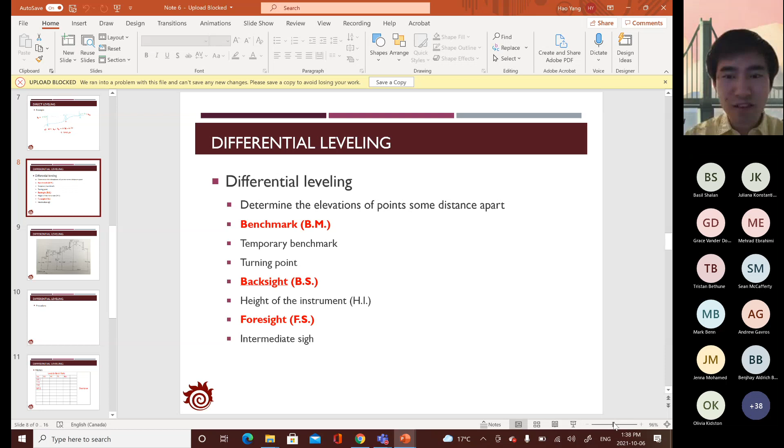So for the method, actually the method you applied in your lab 2 experiment is called differential leveling. With that, we can estimate the elevation difference of multiple points, or about 2 points which are really far away from each other. In differential leveling, there are some concepts we have to know, including the benchmark, which would be the point where we know the true elevation.

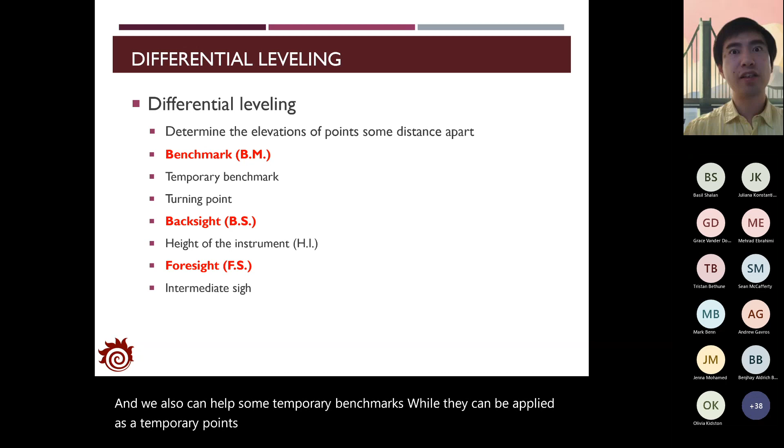And we also can have some temporary benchmarks, which can be applied as temporary points during the experiment. With that, you can do some corrections about the potential errors you conducted during the experiment.

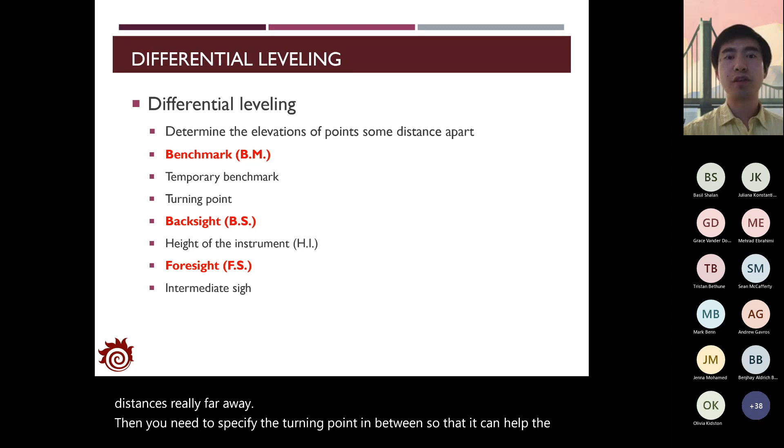And there are some turning points where, if the two measured distances are really far away, then you need to specify a turning point in between so that you are able to observe both of them. You can set up multiple turning points between the two target locations and measure the elevation gradually to reach the target. And you also have the foresight and the backsight.

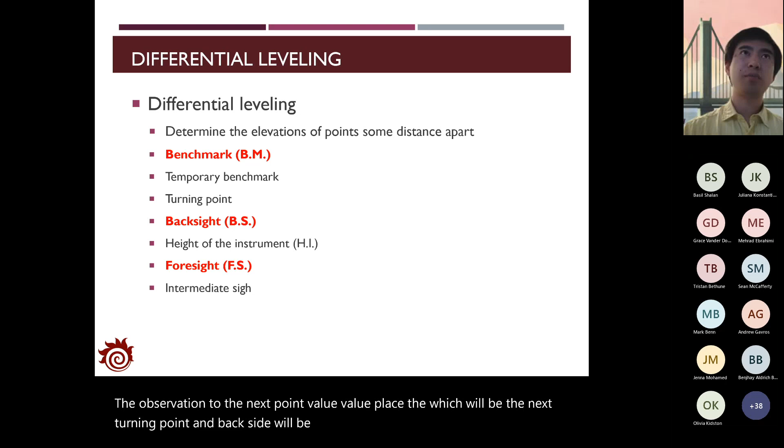The foresight represents the observation to the next point where you place the next turning point, and the backsight will be the observation back to the previous turning point or to the benchmark.

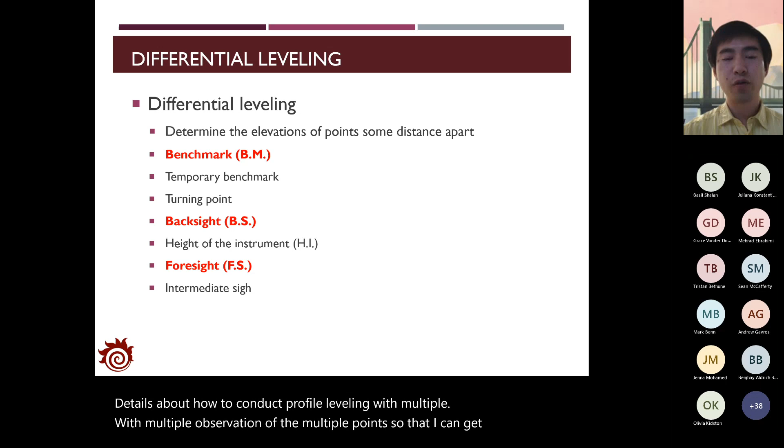Also, you will have some intermediate sight, which is usually applied for profile leveling, and we're going to show you the details about how to conduct profile leveling with multiple observations of multiple points, so that you can get the elevations quickly with a smaller number of turning points.

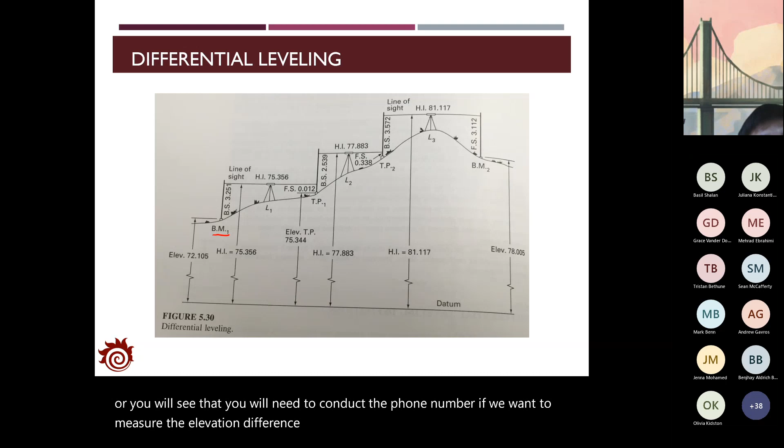Okay, and this figure shows the progress for you to conduct the differential leveling. You will see that, for example, if we want to measure the elevation difference between 2 points, benchmark 1 and benchmark 2, and these two are really far away from each other. And for benchmark 2, it's even on the other side over here, so you cannot see well.

Well, you cannot see where the next point is from benchmark 1. Then you need to rely on several turning points. Here in this example, we just set 2 turning points.

And with that, you are able to observe, to set an instrument. First, set an instrument between benchmark 1 and turning point 1, and you will have the backsight and foresight. Here, the backsight will represent the observation back to benchmark 1. So we said this one is the backsight, and the foresight will be the observation you were trying to read to turning point 1.

So with these two readings, you can then identify the elevation difference between benchmark 1 and turning point 1. In the next page, I'm going to show you how to do the calculation.

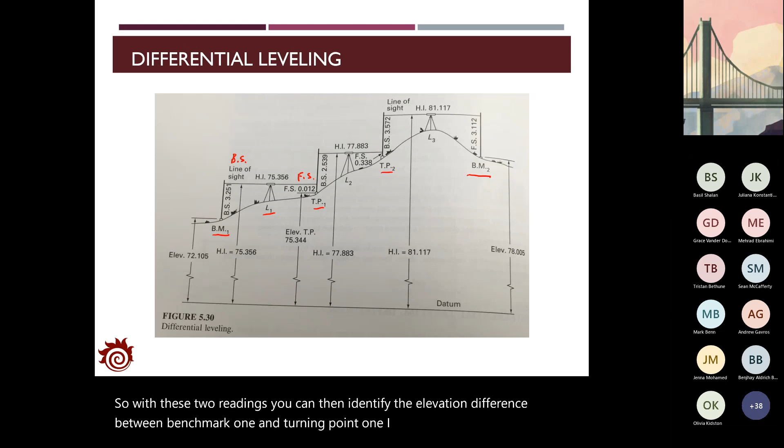And once you finish the measurement for turning point 1, you can then move the instrument to the location between turning point 1 and turning point 2. At this step, you will try to identify the elevation difference between turning point 1 and turning point 2. Still, you will have the backsight to turning point 1 and the foresight to turning point 2.

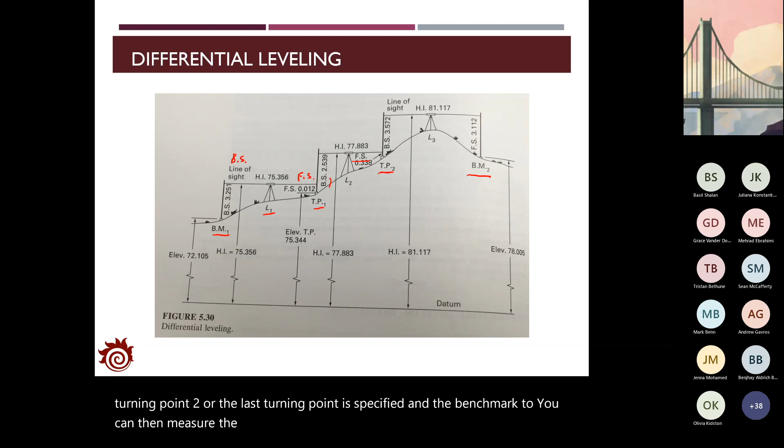And again, you can repeat this process many times until you reach the last segment, where you will have the instrument set between the last turning point specified and benchmark 2. You can then measure the elevation difference between turning point 2 and benchmark 2 based on the backsight and the foresight.

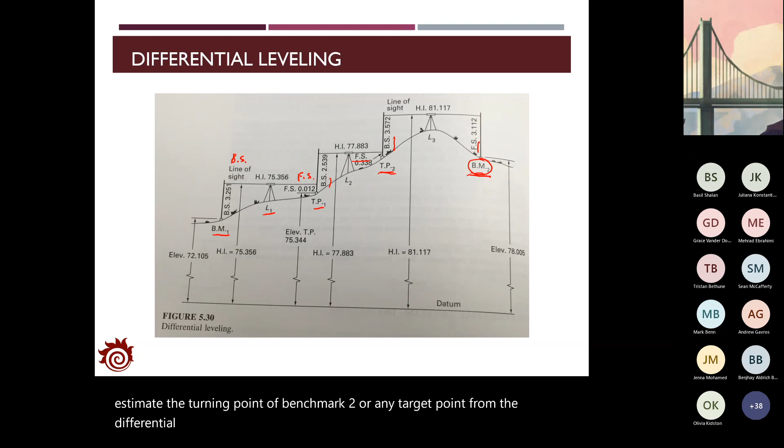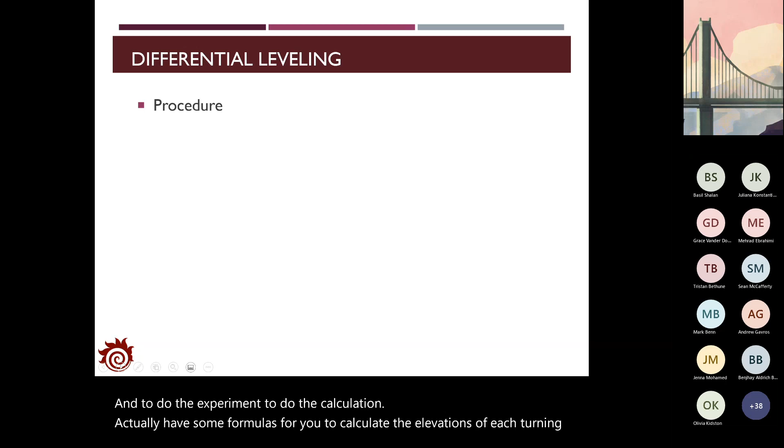So with that, you are able to measure the elevation of all the turning points, and you can then estimate the elevation of benchmark 2, or any target point, from the differential leveling. That's the way for us to conduct differential leveling to measure the vertical distance or elevation difference. To do the calculation, we will actually have some formulas for you to calculate the elevations of each turning point, and also eventually find out the elevation of the target point.

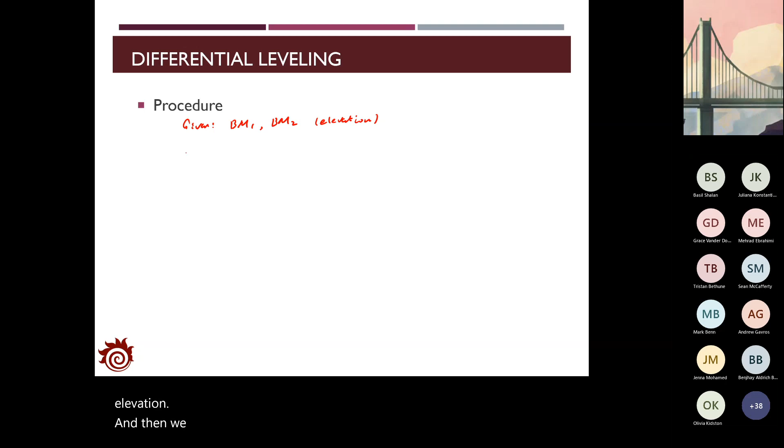So for the differential leveling, usually you will be given the elevation of 2 points, benchmark 1 and benchmark 2. We know their elevation, and then we have the readings for each direct leveling in this differential leveling.

So we have the readings. We have, for the readings between benchmark 1 and turning point 1, the backsight 1 and the foresight 1, and that's the first direct leveling. And we also have the backsight 2 and foresight 2.

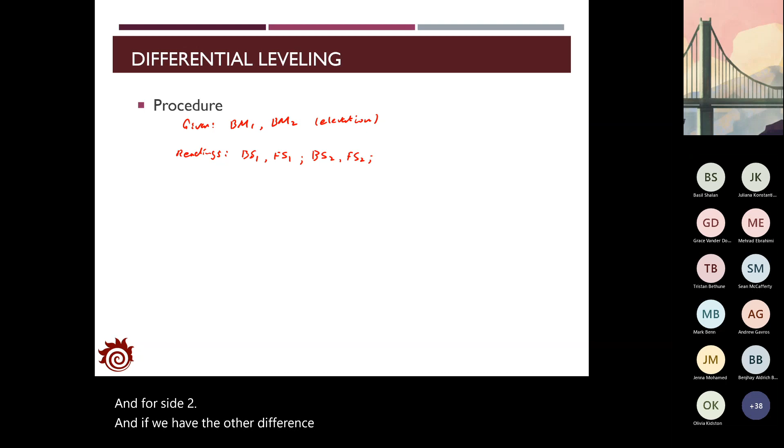If we have different direct leveling setups, you will have different backsight and foresight readings. In the previous example, we also have the third one, backsight 3 and foresight 3. Depending on how many observations you have in the experiment, you will have multiple readings.

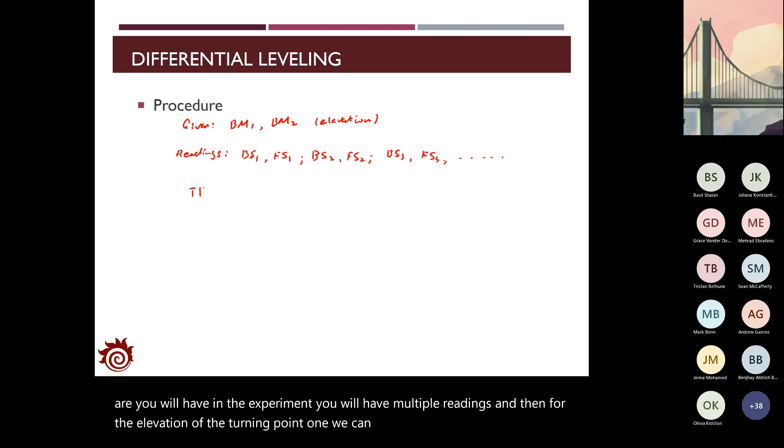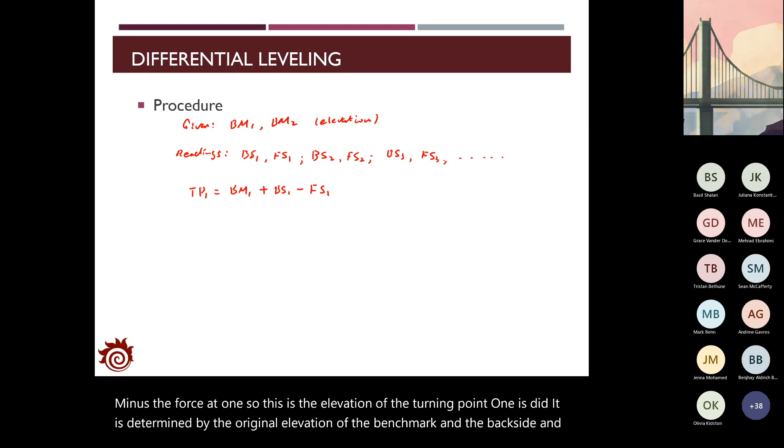For the elevation of turning point 1, we can calculate it as the elevation of benchmark 1 plus backsight 1 minus foresight 1. This is the elevation of turning point 1. It is determined by the original elevation of the benchmark and the backsight and foresight, which are 2 readings from the direct leveling.

Similarly, you can calculate the elevation of turning point 2. You need to use the elevation of turning point 1 plus backsight 2 minus foresight 2. Similarly, you can repeat this process to find out the elevation of the other turning points.

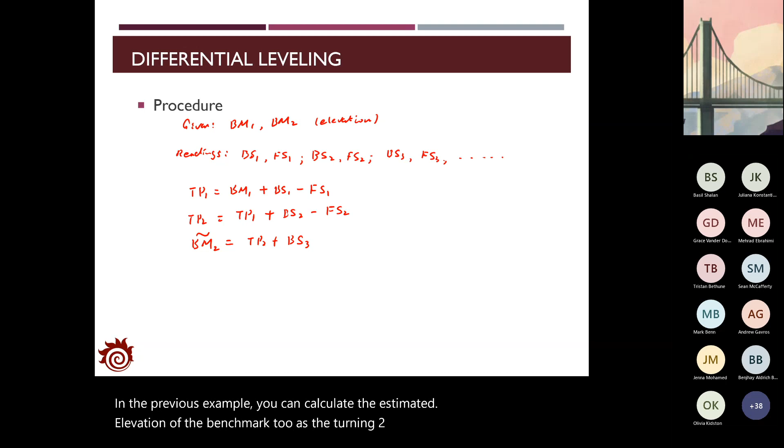In the previous example, you can calculate the estimated elevation of benchmark 2 as turning point 2 plus backsight 3 minus foresight 3. So this is the estimated elevation. It's not the true elevation, it's the elevation you actually estimated from your experiment.

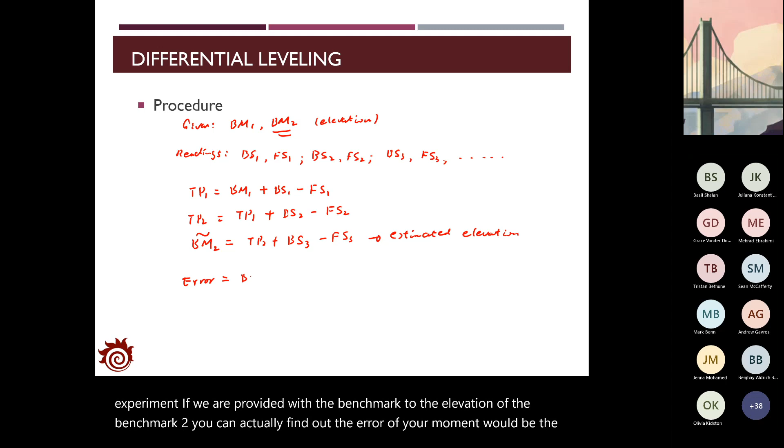If we are provided with the elevation of benchmark 2, you can find out the error of your measurement, which would be the difference between the estimated elevation and the true elevation. In your experiment, you always need to check the potential error. If the error is too large, it probably means you have some wrong operations during the experiment, or you probably applied the wrong formulas to calculate the elevation of the turning points.

So that's the way for you to conduct the differential leveling. In this page, you will see how you need to record all the readings in the field. This table shows the recording for the examples in the previous page.

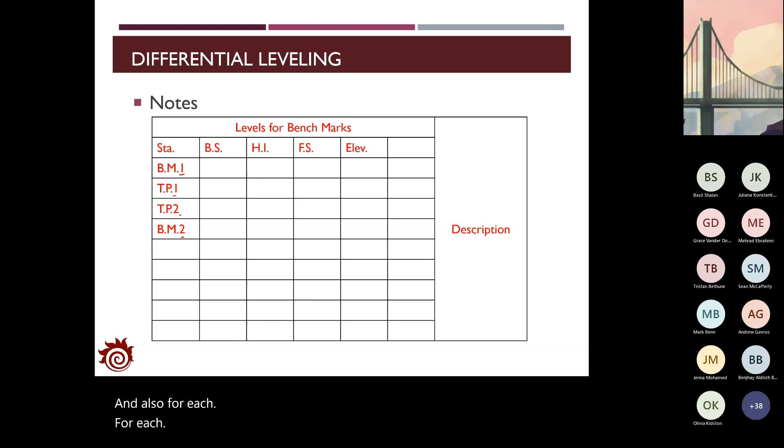So we have benchmark 1, turning point 1, turning point 2, and benchmark 2. And for each measurement, each direct leveling, we will have the backsight and the foresight.

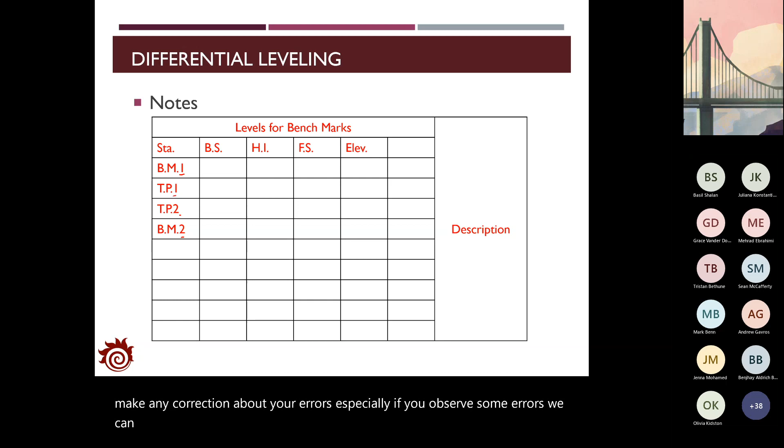Another thing to keep in mind: if possible, it is highly encouraged for you to measure the height of the instrument so that you have some way to make a correction about your errors. Especially if you observe some errors, you can refer to the height of the instrument to find out the potential wrong adjustment in the experiment.

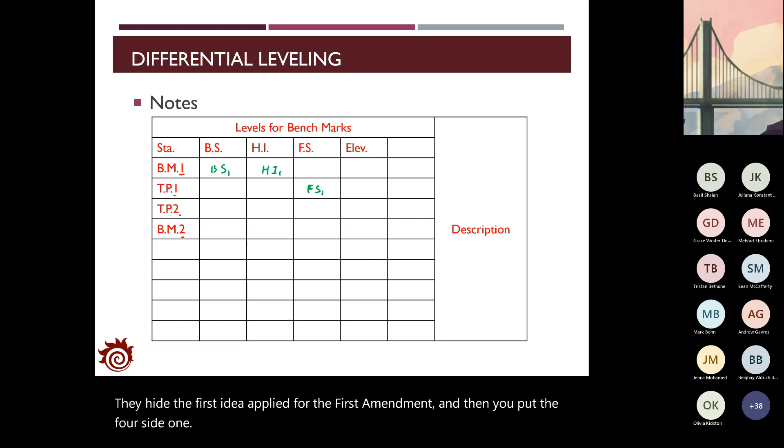To do the recording, we will first put backsight 1 in this cell, and also record the height, the first height applied for the first measurement, and then put foresight 1 in this cell, which is in the same row as turning point 1. Similarly, you can go record the other readings.

So you will have backsight 2, height 2, and foresight 2. And again, you will also have backsight 3, height 3, and foresight 3.

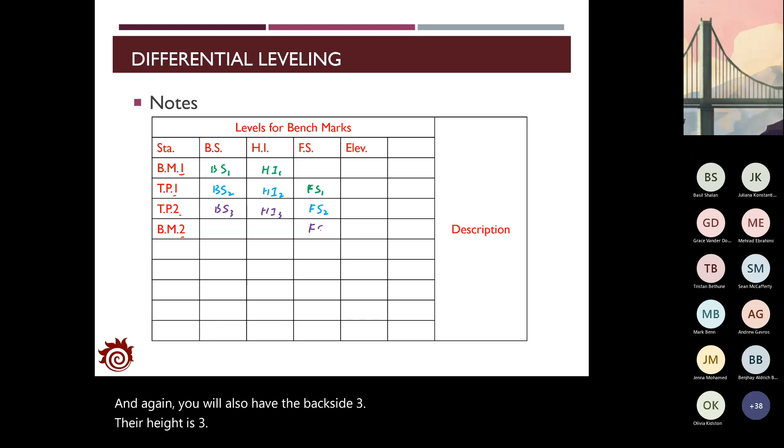We are also provided with the elevation of benchmark 1, and we know the elevation of benchmark 2. This one is also given. So what we want to do is calculate the elevation of each point from the measurement.

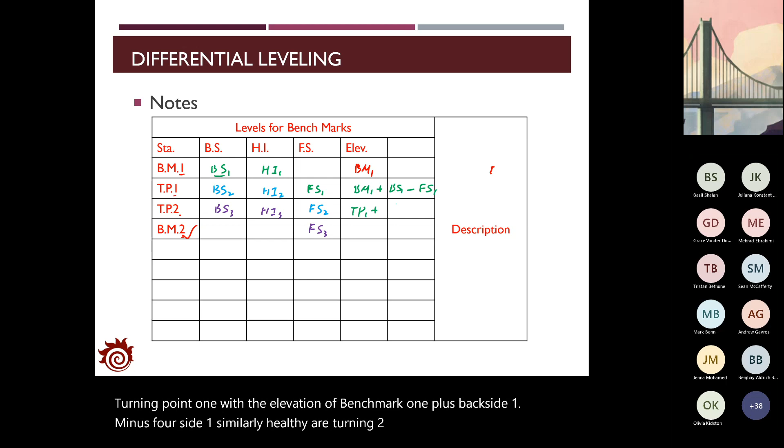With that, we have turning point 1 with elevation of benchmark 1 plus backsight 1 minus foresight 1. Similarly, turning point 2 as TP1 plus backsight 2 minus foresight 2. And you have the estimated value for benchmark 2 as TP2 plus BS3 minus FS3.

And you always need to calculate the error. So you have to record the error as the estimated benchmark 2 minus the true benchmark.

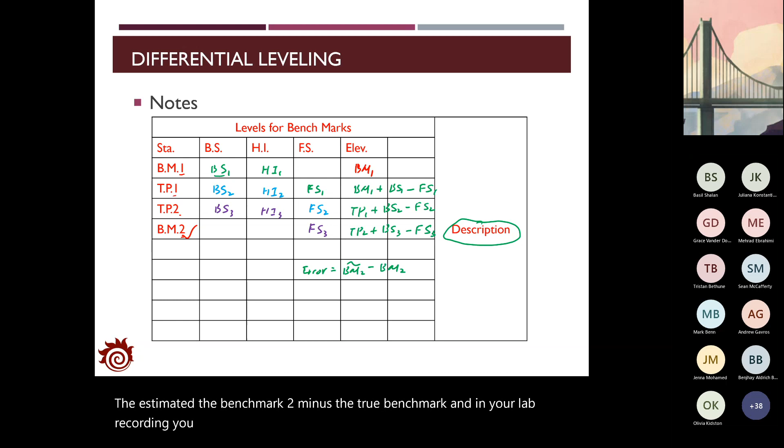In your lab recording, you also need to have some descriptions about the experiment, like how you conducted the experiment for each differential, for each direct leveling, how many turning points you applied, and whether you did any adjustment about the tripod, or if there's anything wrong about your operation of the instrument. You have to record it in the description section. So that's the recording for the differential leveling.

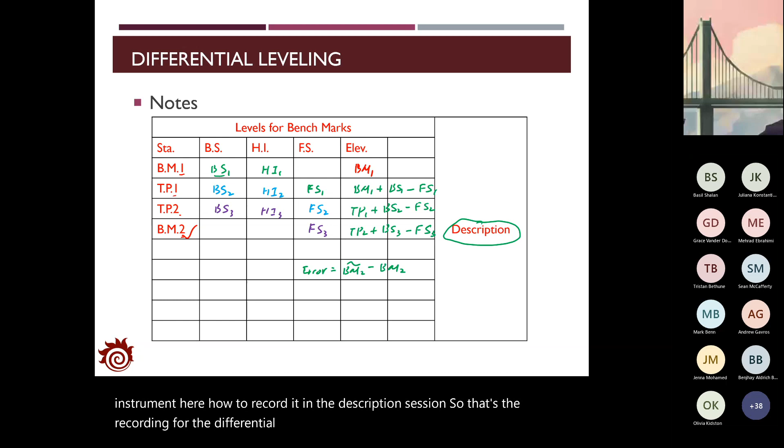With that, we can find out the elevation of all the turning points and the estimated elevation of the benchmarks, and know the errors in your experiment. If the error is too large, you may need to go back to check each measurement and find out where the error is.

So this is the differential leveling, and in reality there are actually several other types of differential leveling. The one we introduced in the previous page is called line leveling. In line leveling, we know the elevations of two benchmarks at the beginning and at the end.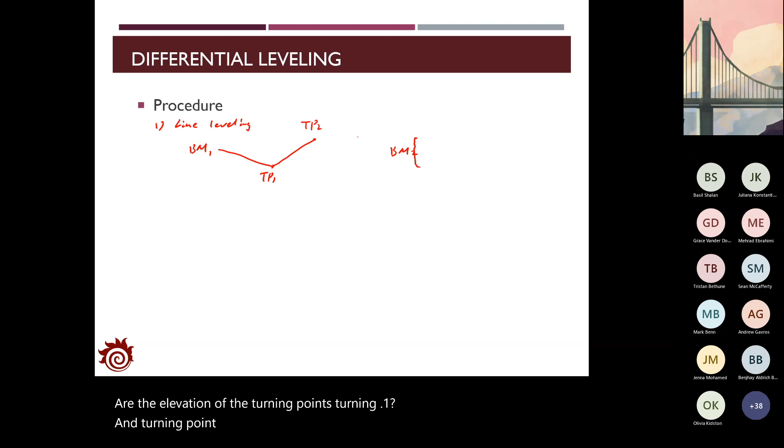We will try to find out the elevation of the turning points, turning point 1 and turning point 2, and then we can find out the error at benchmark 2. With that, we can know how good the measurement is for the whole experiment. This is called line leveling. It starts from one benchmark and ends at another benchmark with known elevations. The second type is called loop leveling.

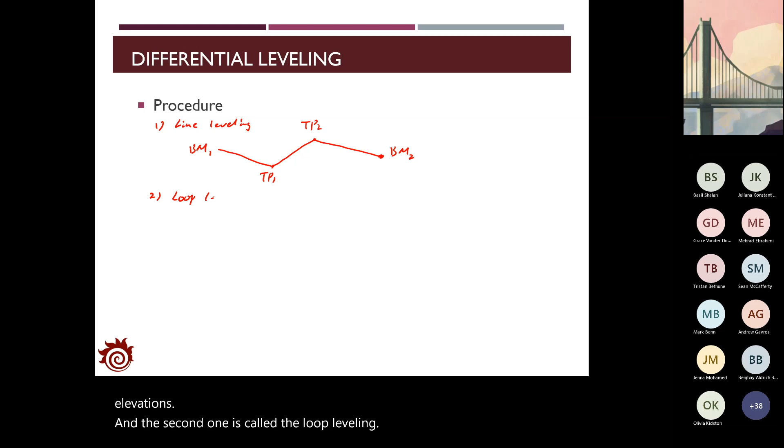With loop leveling, we only have one benchmark. This is usually applied to measure the elevation of multiple points in the area we're interested in. For example, we are provided with the elevation of one benchmark, benchmark 1. Then we can estimate the elevation of the other points: turning point 1, turning point 2, turning point 3, and turning point 4.

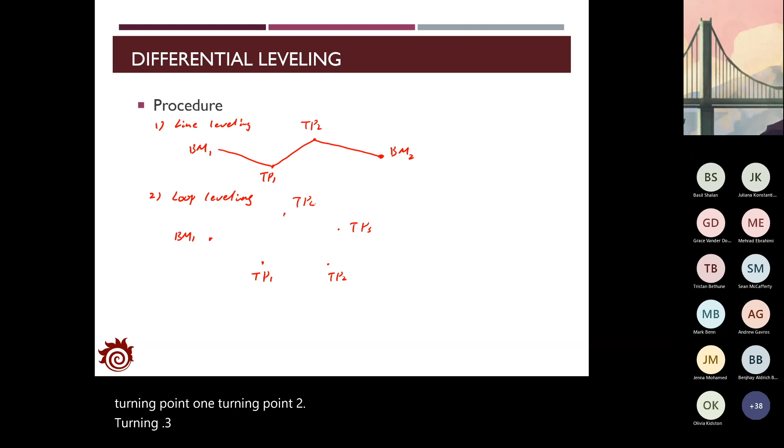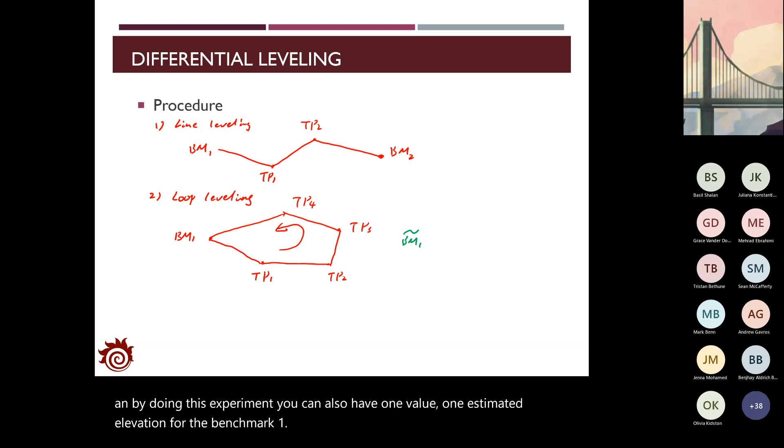We conduct the experiment through those lines, measure the elevation of each point, and then return back to benchmark 1. By doing this, you also get one estimated elevation for benchmark 1. You can then find the difference between the true value of the elevation and the estimated value, and that will be the error you have to consider to make sure your measurement is right or wrong.

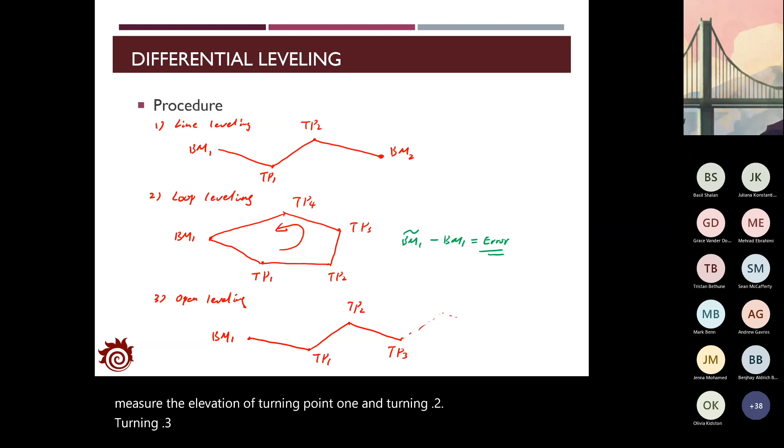The last one is called open leveling. With this, you will also only have one known location, which would be benchmark 1, and then you do the measurement from this point. You can use benchmark 1 to measure the elevation of turning point 1, turning point 2, turning point 3, and some other points. This kind of measurement will be ended at the location you want to measure, and of course you don't know the elevation of all those turning points, TP1, TP2, or TP3. So in that sense, we cannot identify the error.

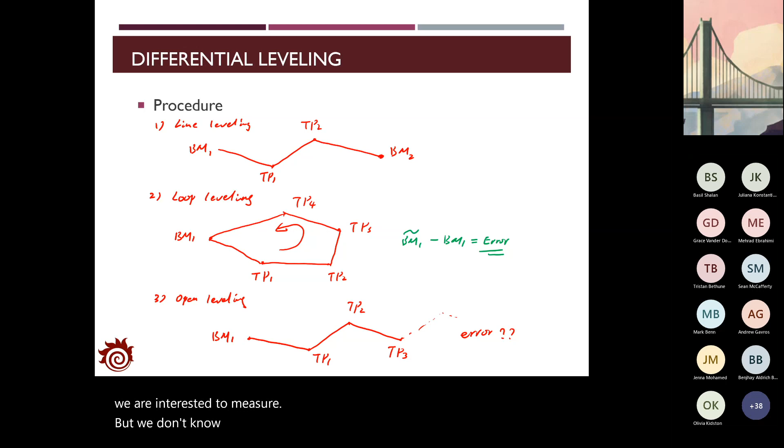The error is unknown in this case. That's also the reason we call this open-end leveling. Even though we can find the elevations of the points we're interested in measuring, we don't know the errors in this measurement. So those would be some typical differential leveling methods applied in reality.

The other thing I want to introduce in this class is a potential method for you to balance the errors in differential leveling. This is called balancing the backsight and the foresight distance. With this kind of method, you are able to remove the errors during the experiment, even when the transit level is not adjusted appropriately.

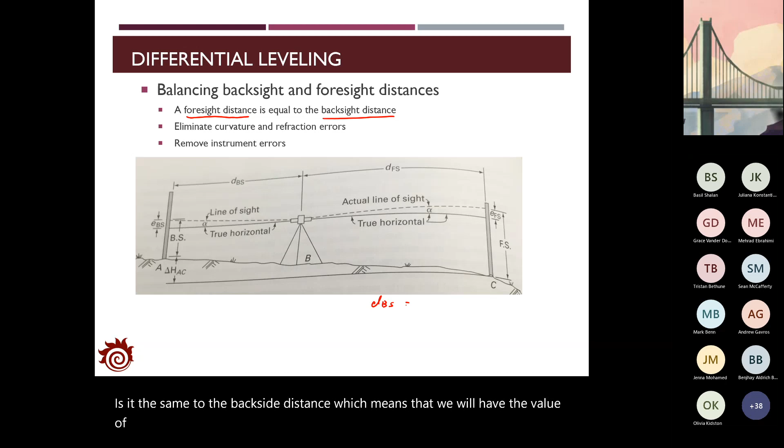To do this kind of adjustment, we want to make sure that the foresight distance, the horizontal distance, is the same as the backsight distance, meaning we will have the value of dBS be the same as dFS. If we have this setting, then we can eliminate the curvature and refraction errors, and also remove the instrumental errors.

The figure here shows one typical instrumental error during the experiment. Assuming you have a true horizontal line, which will be the solid line, but if you did not adjust the transit level very well, you will actually have a certain small angle, which will make your sight line a little bit different from the true horizontal line. In that sense, what you observe for the backsight and foresight will be wrong.

The error in this case will be, for example, for the backsight: the error in the backsight would be approximately equal to the distance of the backsight times sine alpha. Similarly, you can find the errors for the foresight as the distance of the foresight times sine alpha.

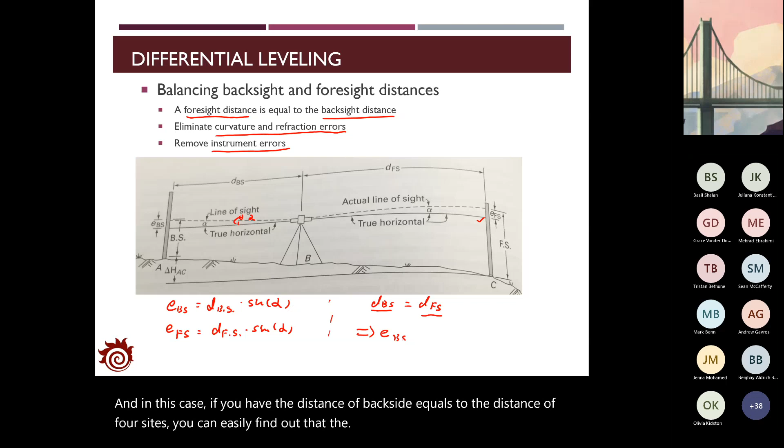In this case, if the distance of the backsight equals the distance of the foresight, you can easily find that the error of the backsight is the same as the error of the foresight. Then based on the calculation, if we know the elevation of A...

...the horizontal elevation of A, you can find out if this one is known. You can then find the elevation of point B, point C, as EA plus backsight...

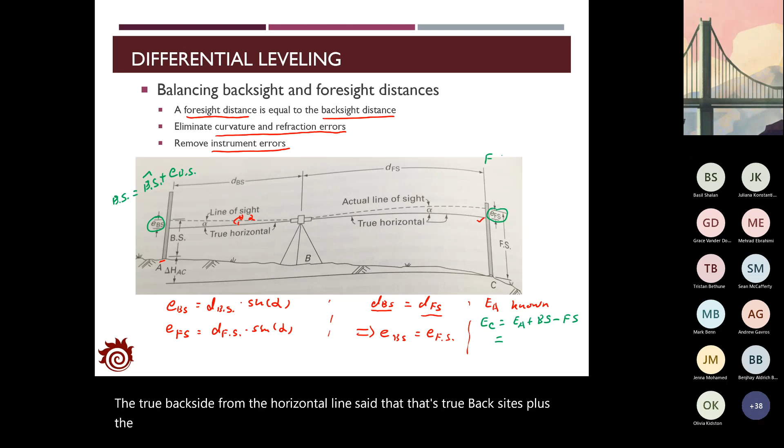...minus foresight, and then the error from your observation can be eliminated because the backsight equals the true backsight from the horizontal line, say that the true backsight plus the error. Similarly for the foresight, it will equal the true foresight plus the foresight error.

If these two are the same, then you will find that this equals EA plus the true backsight minus the true foresight, which will be the true elevation difference between point A and point B, or point C.

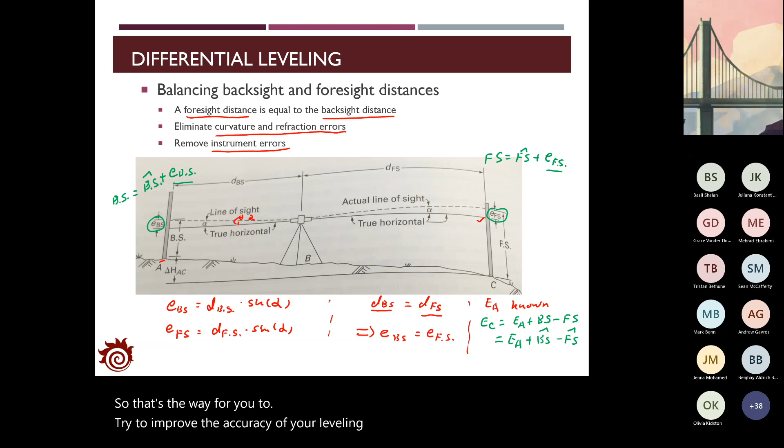So that's the way for you to try to improve the accuracy of your leveling experiment by balancing the backsight and the foresight distance. The last thing I want to introduce about leveling is called profile leveling.

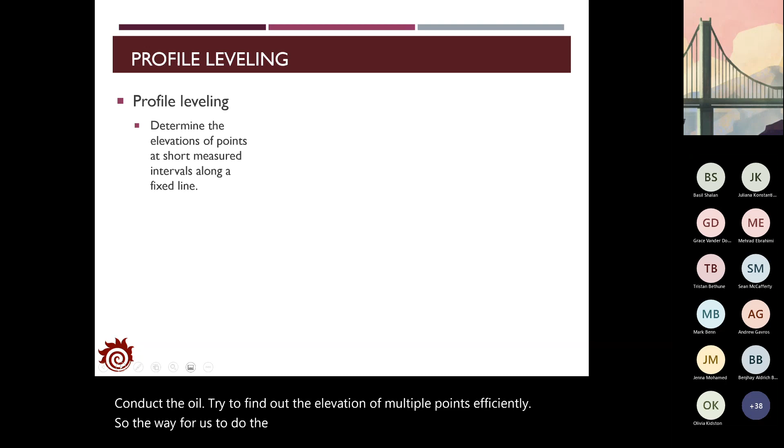This is one method which can help you find out the elevation of multiple points efficiently. The way for us to do profile leveling is we first specify a hub, which is also the benchmark with known elevation.

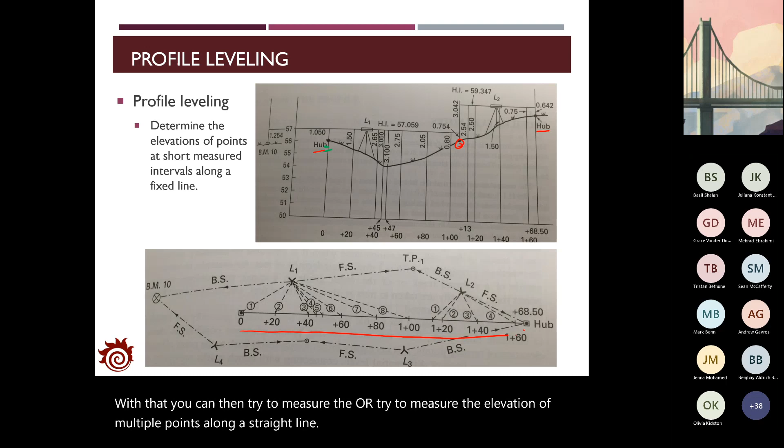Then we can try to set up the level transit at some points between two hubs, hub 1 and hub 2, and also specify some turning points if they are really far away from each other. With that, you can measure the elevation of multiple points along a straight line, or along any curved line.

Through each direct leveling, for example, if we want to start with the benchmark 0, or benchmark 10, and we also have the hub at the end, we want to measure the elevation at almost 12 points along this straight line.

What we can do is first specify the turning point, which is not along this straight line. Instead, it's at some location which you can easily observe between benchmark 10 and turning point 1 with the transit level. With that, you will have the backsight to benchmark 10 and the foresight to turning point 1.

And then you will have some intermediate sights to observe the points along the line you're trying to measure. So in the first direct leveling, you will have level points 1 through 8 observed.

And if you have other points you want to further measure, you can move your instrument to another point and have the backsight to turning point 1 and the foresight to the hub, and get the intermediate sight of another 4 points.

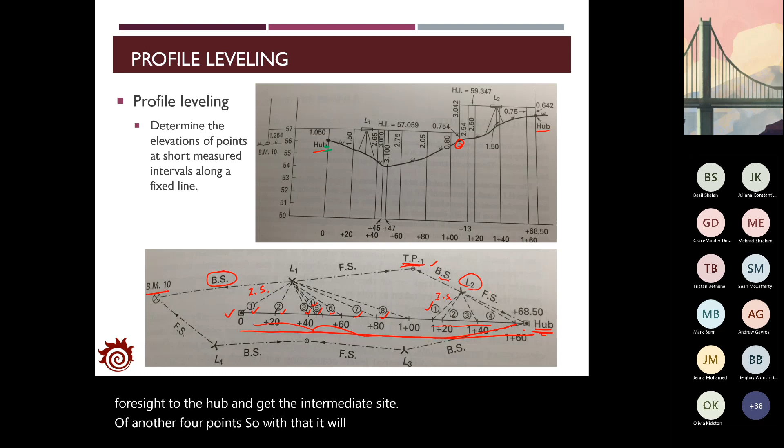So with that, you will have both the backsight and foresight to turning point 1 and the hub, and the intermediate sights to the points along the line you are trying to measure.

And if there are more points you want to measure, you can set up more turning points and measure the intermediate sights from those turning points to the points in the line you are trying to estimate. Then we can calculate the elevation of all those points along the line we are trying to measure.

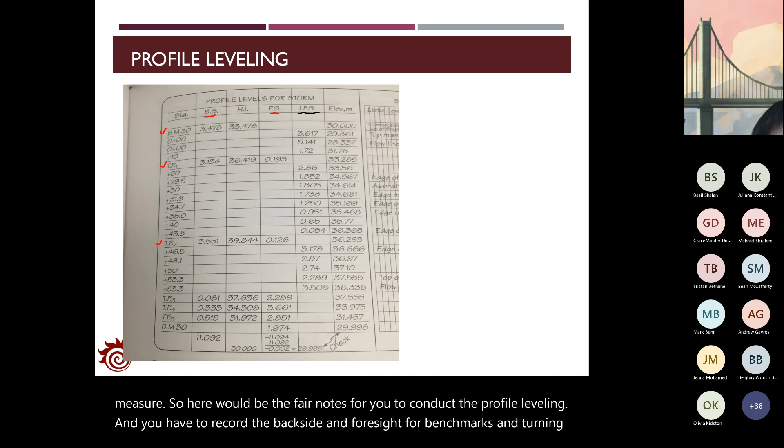So here would be the field note for you to conduct the profile leveling, and you have to record the backsight and the foresight for benchmarks and the turning points. You also need to record the height for each measurement.

Again, you need to get the foresight for turning points and also the hubs. But for those points along the line you're trying to measure, you will observe the intermediate foresight. This is the information you will need to apply to measure the elevation of those points.

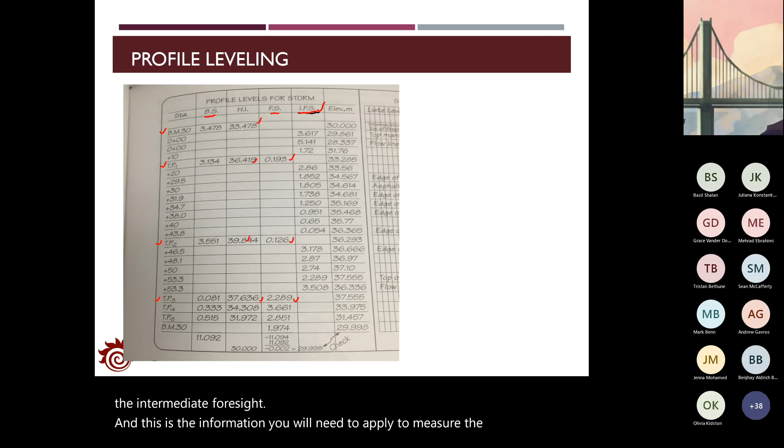Say that point 0, there will be point 0 plus 0, point 0 plus 0 might be 0.1, 0.5, something like that. With that, let's see how we can measure or estimate the elevation of those points along the line we want to measure.

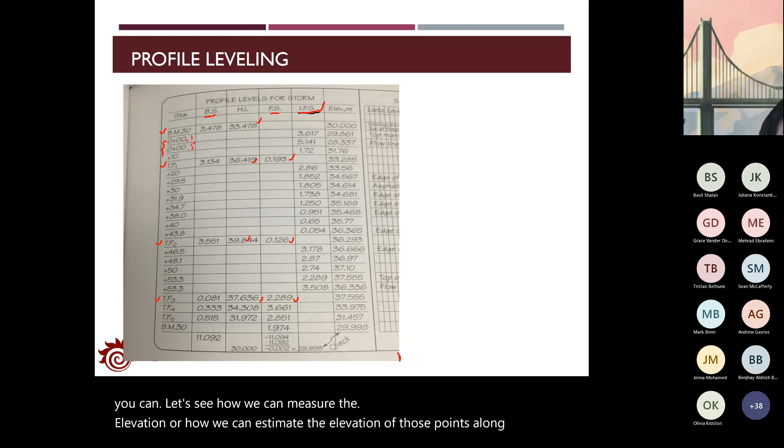Let's take the example of the first point. For this point, we have the backsight to the benchmark 30. So we have benchmark 30, and we know the backsight, so we say that it's backsight 1. We also know the intermediate foresight.

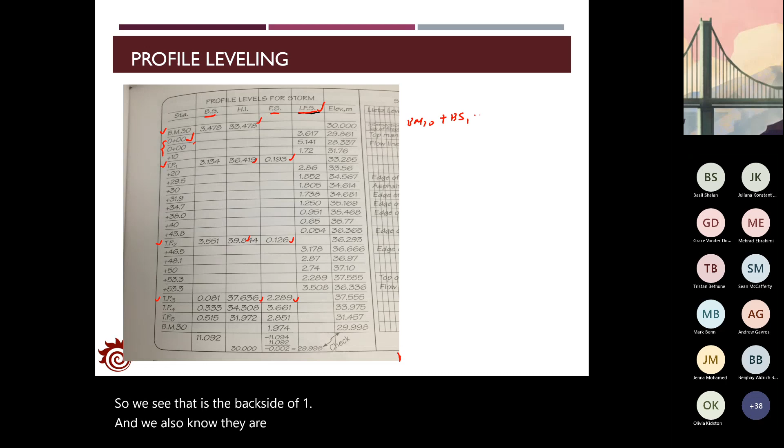Then we subtract the intermediate foresight. In this case, we will have the value of 30, this would be the elevation of benchmark 30, plus the backsight, that is 3.478, minus the intermediate foresight. The intermediate foresight is 3.617.

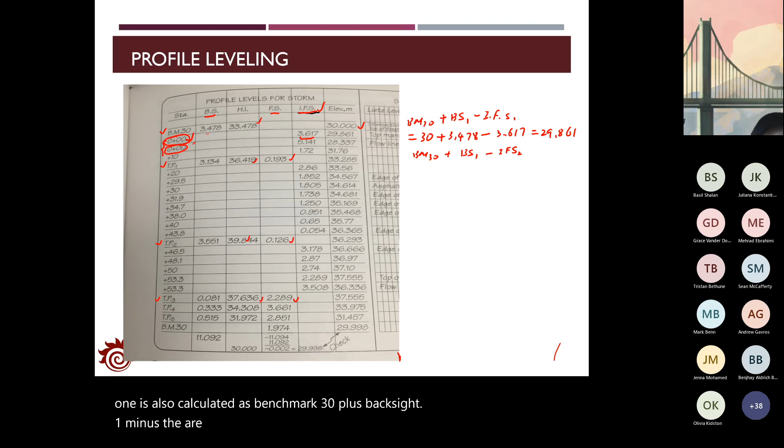And for the second point, this one is also calculated as benchmark 30 plus backsight 1 minus intermediate foresight 2, which will give you the value as 30 plus 3.478 minus the intermediate foresight as 5.141, which will give you the value as 28.337.

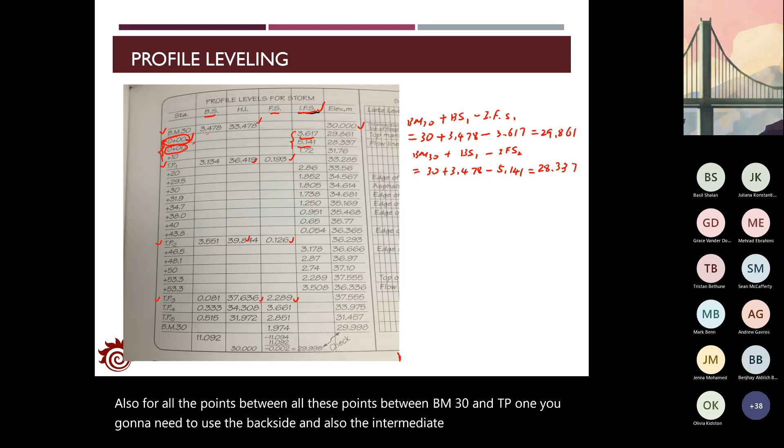So for all these points between BM30 and TP1, you're going to need to use the backsight and also the intermediate foresight to calculate the elevation. But for the other points, for example the random points between turning point 1 and turning point 2, we have to use the backsight to turning point 1, the elevation of turning point 1, and the intermediate foresight to get this elevation.

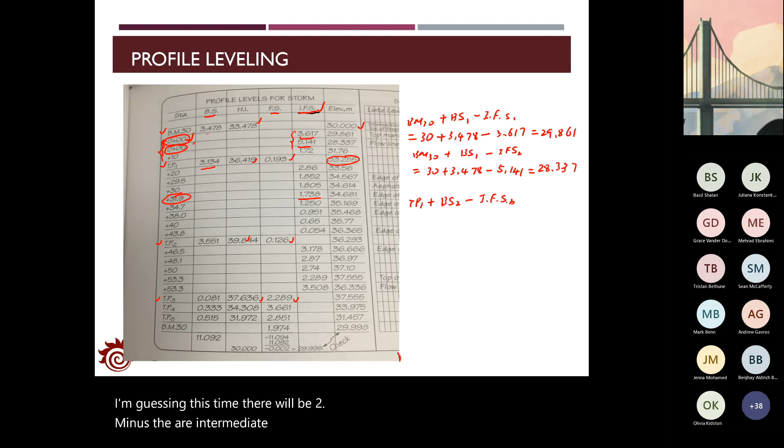So that is TP1 plus backsight 2, minus the intermediate foresight. Just call it K. So we have the value as 33.285 plus 3.134 minus 1.738, which gives you the value as 34.681. So you can do the calculation about the elevation of all the intermediate points along the line we are trying to measure, and if the line is too long, you need to set up more turning points. And with that, you have the elevation.

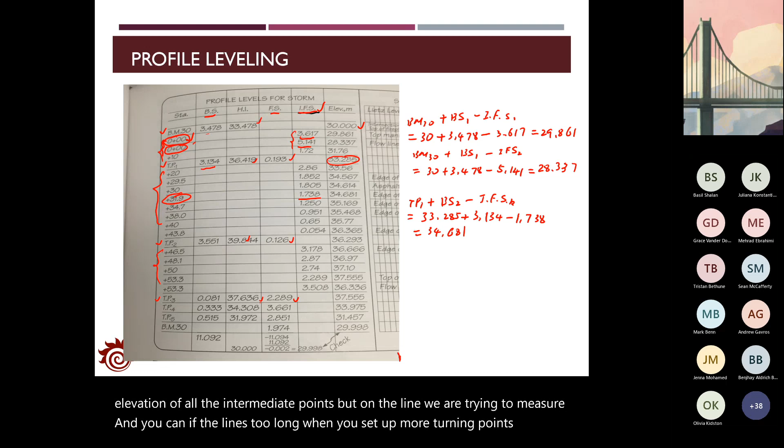So every point, and also you can check the errors if this is kind of loop leveling. You can check the errors once you return back to the original benchmark.

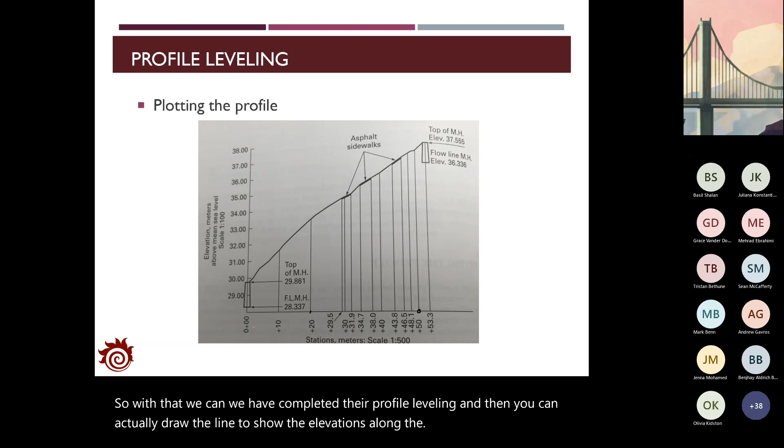So with that, we will complete the profile leveling, and then you can actually draw a line to show the elevations along all the points you measured. So this is actually the points along the line, and the vertical axis shows the elevation you measured from the profile leveling, and you can know what the slope of the line looks like from the profile leveling easily.

And with that, in this case, you actually only conduct, for this example, 1, 2, 3 backsights to complete the measurement of more than 10 points along the target line. So it will be very efficient.

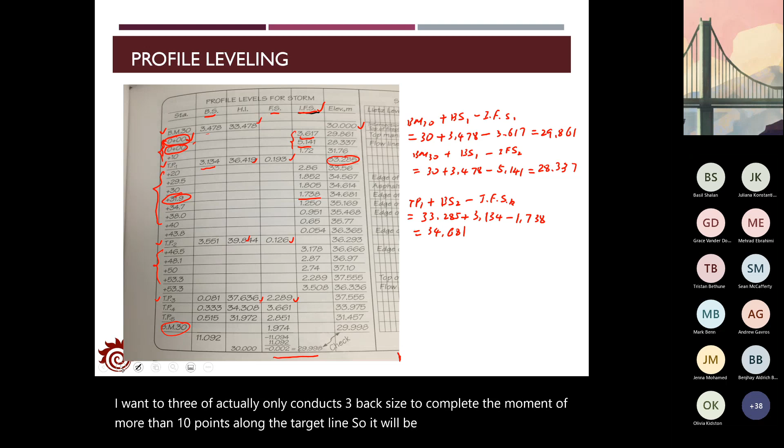So that will be all about the leveling. Do you have any questions? Any questions about the leveling? If no, then I will go to the next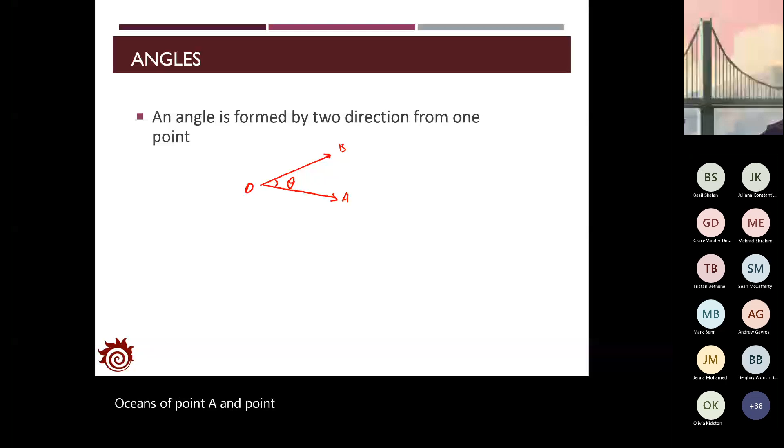So the definition of the angle is quite intuitive. Basically, the angle is defined with two directional lines. For example, if we have a point O, and lines O to A and O to B, then the angle is between the relative locations of point A and point B. Usually, the angle is measured with the units of degree, gradian, and radian.

For the degree, we have already introduced previously. For one revolution, the degree will be 360 degrees. But for the gradian, it's different. The gradian defines one revolution as 400, and for the radian, it's defined as 2 pi. For the unit of degree, we have 1 degree equal to 60 minutes and 1 minute equal to 60 seconds. So this is a very common unit for us to measure the angle.

The gradian unit is not quite common, but the radian is also very common and is applied a lot for the calculation of sinusoidal functions. Basically, 1 pi in the radian unit represents 180 degrees, and we can use this relationship to convert degree to radian, and then calculate the value of the sinusoidal functions.

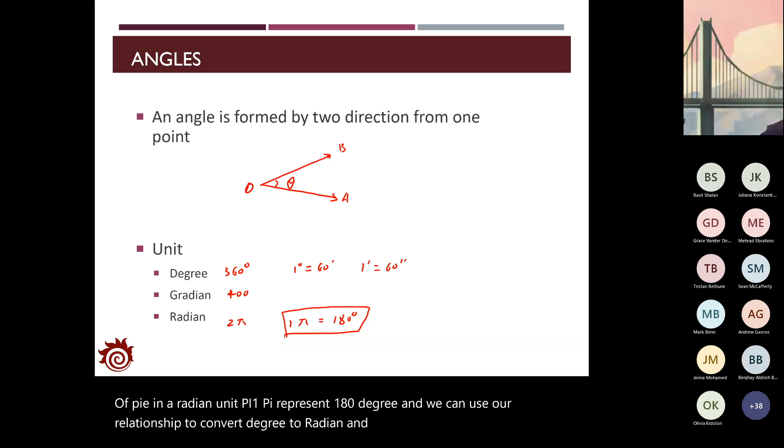So that's the basic definition of the angle. The definition is pretty simple, but if we go to see the lines on the Earth, the directions on the Earth, it becomes very complicated. Usually for the Earth, we can consider the surface as spherical, and the easiest way for us is that we need to use some geocentric system to describe the points on the surface of the Earth or at some locations below the ground. Generally, there will be two systems for us to describe any point in 3D space. The first one is called the rectangular system.

So for the 3D coordinates, we will use the x, y, and z values to represent any location in 3D space. The second one is called the polar system.

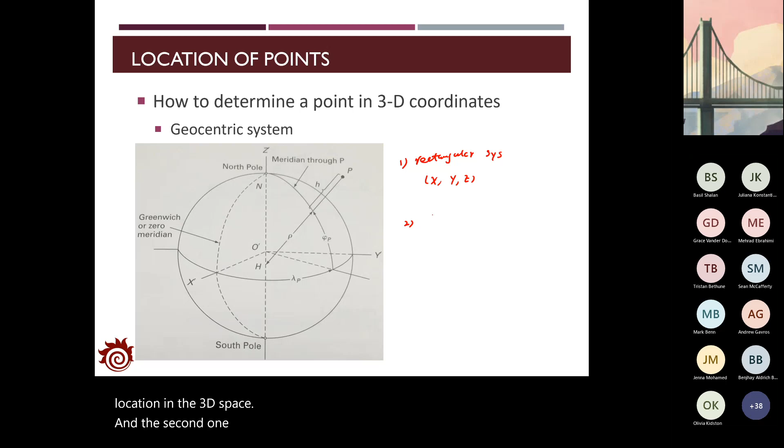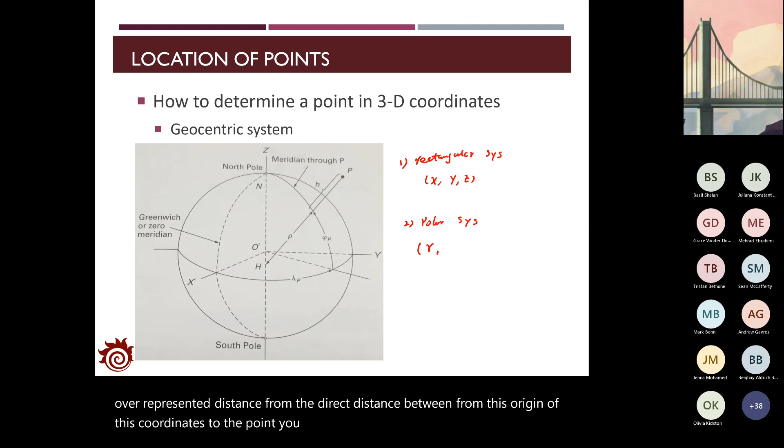In this system, we use 3 variables: one distance with 2 angles. R represents the direct distance from the origin of these coordinates to the point you want to measure, and alpha and beta are applied to identify the direction of the point in the polar system.

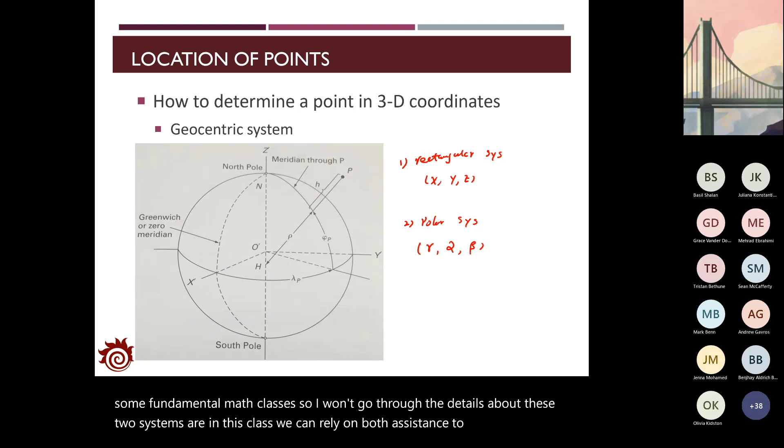I believe you have learned both of these in some fundamental math classes, so I won't go through the details. In this class, we can rely on both systems to identify a location in 3D space, determine the distance between any two points in 3D space, or measure the horizontal and vertical angles of any two lines.

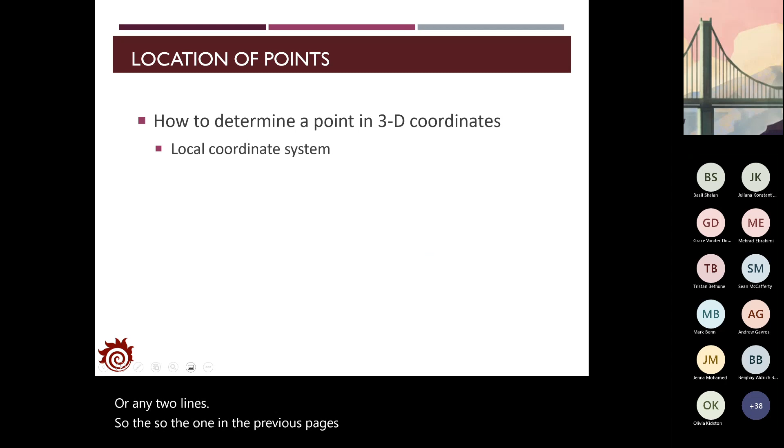The one on the previous page is the geocentric system. You consider the Earth and use the center of the Earth as the origin. But in reality, if we just want to measure in a small area, we would like a simpler coordination system, which we call the local coordination system.

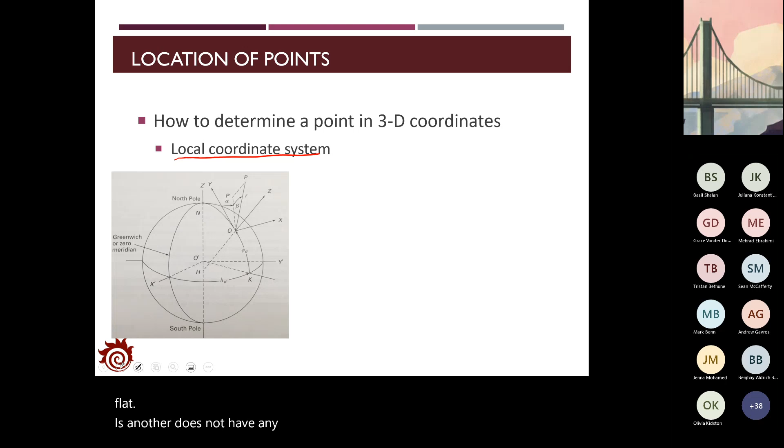For that one, we assume the plane is flat, without any curve. So we can just use the simple local coordination system, with coordinates from the x, y, and z axis, to identify any locations you want to measure in this 3D space.

In this class, especially for angle measurement, we will focus on the local coordination system, where we consider the Earth as flat, and use the rectangular coordination system to measure the x, y, and z coordinates of a point, and then use these values to identify the directions of any lines.

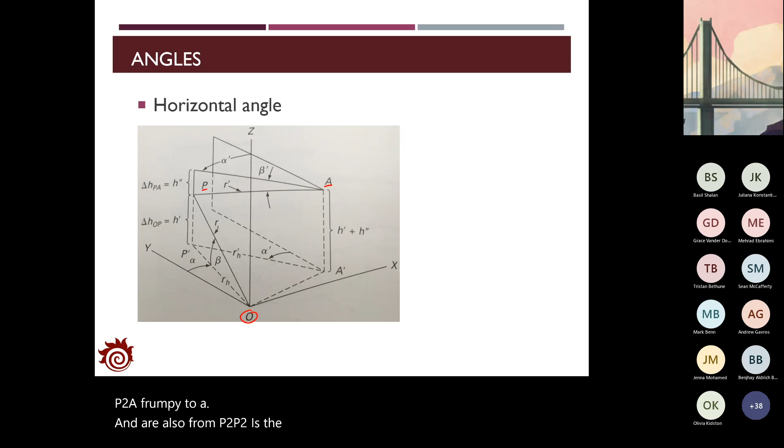Let's check a simple example. Here we consider a line from P to A, and also from P to O, where O is the origin. We want to find out the horizontal angle of AP, the horizontal angle from AP to O.

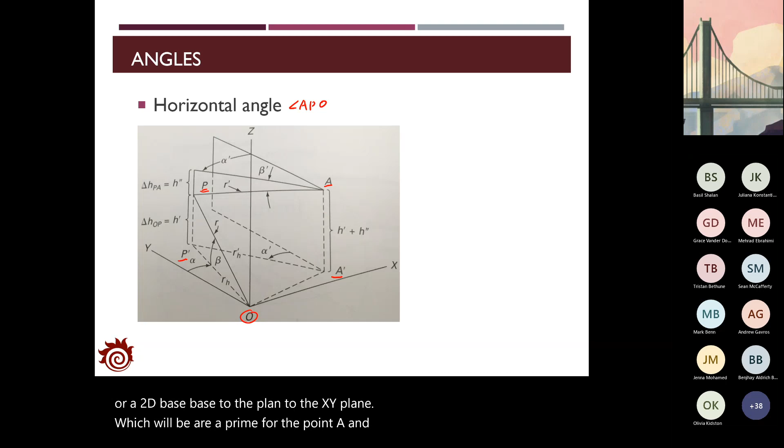To identify the horizontal angle, we first try to find the projected points of OP and OA onto the base, the XY plane, which gives A prime for point A and P prime for point P. Then you can connect the points O to P, O to P prime, and A to P prime.

This angle is called the horizontal angle of APO. Of course, you can also try to project them onto other planes. That's also fine—you will find the angle would be the same.

So that would be the horizontal projected line. For example, if we want to find the vertical angle from O to P, you need to find the projected line from O to P, and then the angle between O-P and O-P prime is defined as the vertical angle, which in this case refers to beta.

Basically, for all angles defined in 3D space: if you want to find the horizontal angle, you need to go to the horizontal plane. If you want to find the vertical angle, you need to project onto some vertical plane, or find the projected line and get the angle between the projected line and the original line directly.

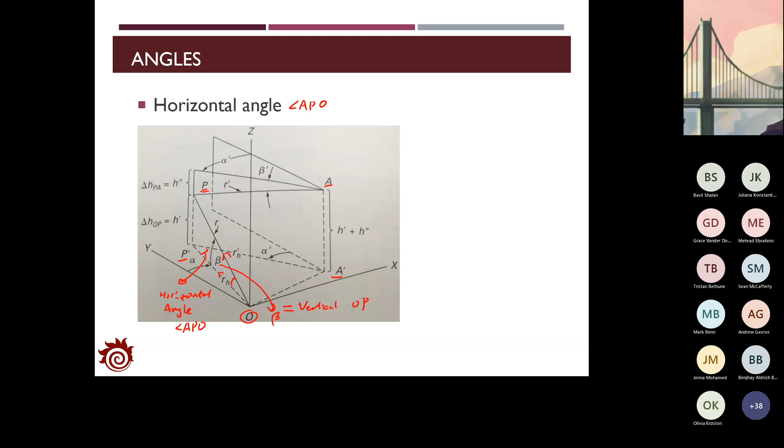So this would be the horizontal angle and vertical angle in 3D space for one line. I guess I ran out of time, so I'll stop here. In the next lecture, I will continue the introduction about this, and you're going to work on lab 4 and lab 5 after the reading week.